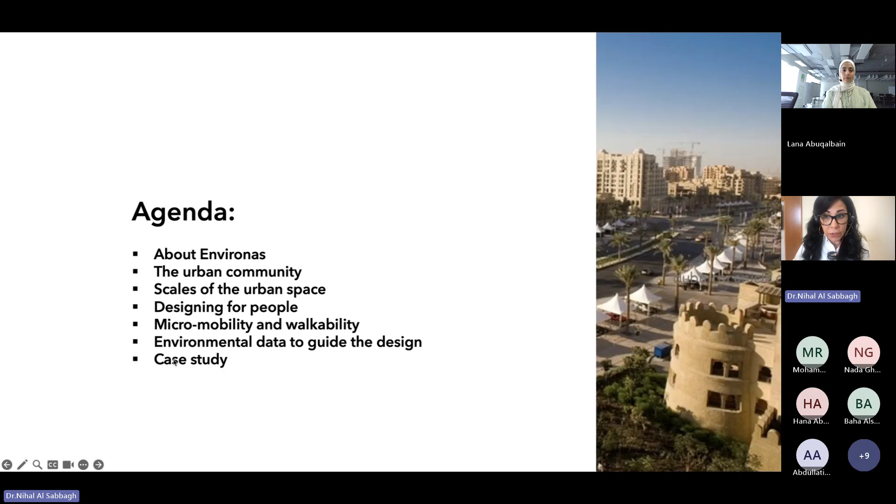So today I'm going to discuss what the urban community means. I will touch on scales of urban spaces and the notion of designing for people, which is a very hot topic taking over in many cities across the world. I will also define the notion of micromobility and walkability, particularly in hot cities, and showcase how we used environmental data to develop our projects in guiding the design for walkability. I will, last but not least, end with one of the case studies that we have worked on at Environas.

At Environas, we have a vision and a mission, which is sustainability at every space. And when I say every space, that means outdoor spaces, indoor spaces. So we do multiple services that have got to do with design and assessment. But the way how we envision sustainability is embedded within the people, the attributes of the physical environment as well, and how they integrate together.

We have three sets of services at Environas, one of which is environmental design. We conduct architectural design, urban design, interior and landscape, all based on the fundamentals and parameters of the environmental pillars that are needed. We integrate sustainability measures that touch also on economical and social aspects. We conduct environmental assessments such as energy modeling, lighting assessments, post-occupancy evaluation, and microclimatic analysis, which is what we are going to elaborate on today. We also do life cycle assessments and environmental impact assessments.

We have multiple partnerships with other entities in the UAE and in Egypt that also assist us with taking different scales of projects. We believe so much in research, internally and externally, so all our designs and environmental assessments are based on research, and when we say that, we conduct our own research. Myself, as an academic, I do conduct a lot of research in multiple environments and integrate that into the assessment and environmental design services. Today I'm going to touch on that in multiple points, and how through the research I was able personally at Environas to conduct assessment services and derive from that a design solution.

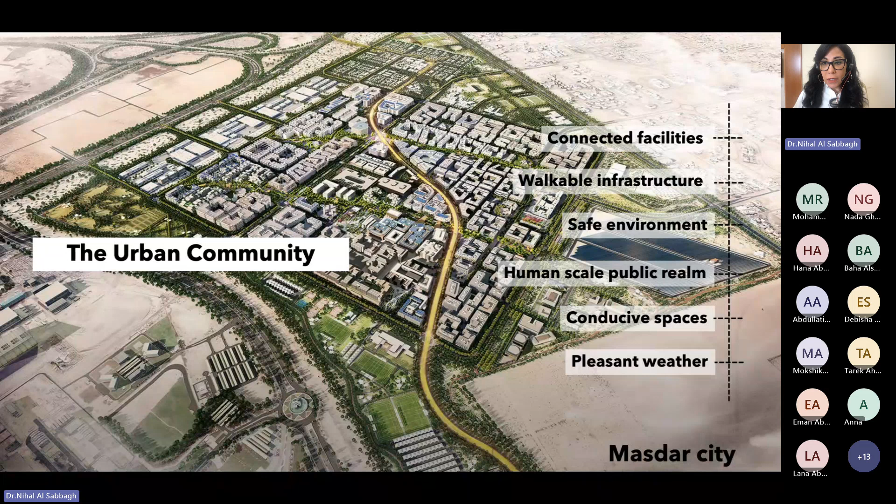Sometimes we do see, and I think many of us have experienced that, whether in the UAE or across other countries, that we do live in urban areas but not urban communities. And when I say urban communities, it means that the intangible part, which is the social interaction between people, the other dimensions, are not there. What creates these conducive spaces, such as walkability, such as interaction, is the connected facilities, for example. What gives you this sense of belonging to this particular space comes from also the notion of safety, whether it's family oriented, whether it's more of individual livings.

Of course, the case for Masdar City is a very early starter on that particular notion, where car-free routes were designed at a very early stage with sustainable mobility modes to be able to transport people between different points within the urban area through other modes than cars or electrical cars, as well as walkable infrastructure. When I say that, the case study has been able to look into multiple dimensions, such as shade, such as ventilation, and other aspects.

So when we look at the urban community in Masdar City, what brings everything together is the notion of car-free routes. We have residential areas, commercial areas that attract people to move between one point and another, and public spaces, which is where people are moving and interacting.

We have community facilities, very important for connectivity of the urban area. We have mobility and transportation, touched on earlier regarding sustainable transport. The infrastructure there is essential to define a successful urban community, all under the umbrella of governance and safety, to take it to the next level where social interaction happens. We also have economical and employment zones, environmental and ecological features, as well as cultural identity and aesthetics.

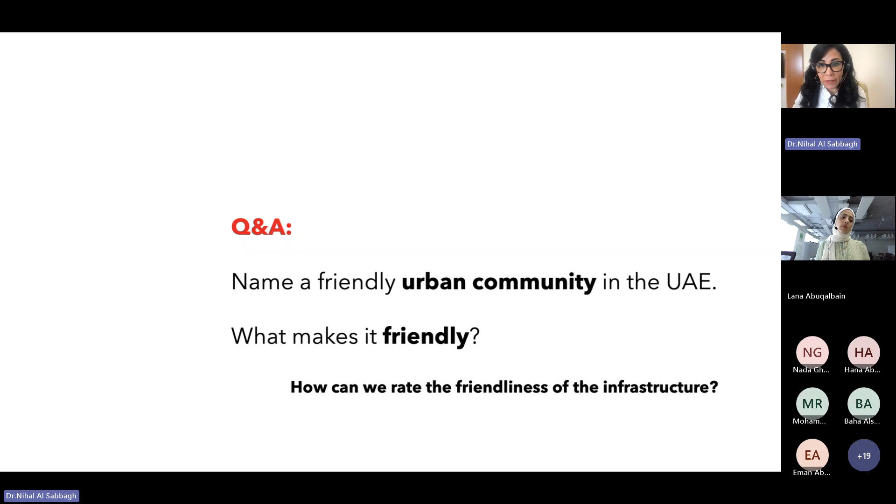Okay, so I highlighted three urban communities, one of which is Greens, Jumeirah Beach Residence, and Downtown. The three examples are totally different compared to each other.

Greens is a residential area. It does not focus on commercial facilities, however it has a few amenities there. It has a school, a market, a mosque, and so on. However, if we rate or look at the infrastructure design, it's very successful in terms of height to width ratio, shading, greenery, and so on.

But do people actually move? Do people actually walk or use scooters and bikes, and for how long? The Jumeirah Beach Residence, on the contrary, is a little bit different.

The human scale there is different compared to Downtown and Greens. Still, the infrastructure is very live, and the reason is the presence of facilities and amenities. The commercial facilities there are responsible for attracting too many people into the space, reviving walkability despite the lack of shade or urban ventilation, which is a little different compared to Greens.

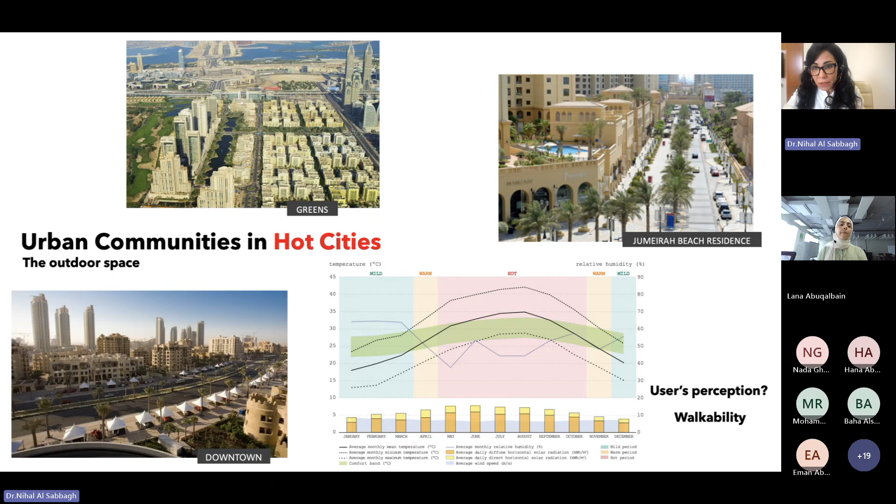The reason I say that is even when we look at the warm period in April, you could walk in the spaces in the evening and they're still hot. So they are not conducive - you're still bothered whether by the heat or the humidity levels. The reason for that is the heat balance parameters involved, which is the time of heat exposure, whether this space was able to breathe and release back the heat accumulated during the time of solar radiation, depending on the enclosure.

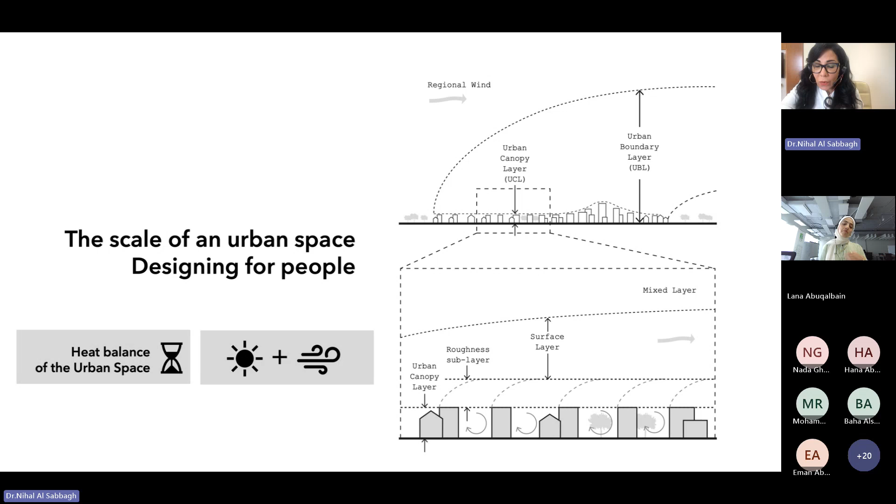So the solar radiation has been removed, however the humidity was there. But this space performed very well during later times of the day, when the solar radiation was not there - so this space would probably be cooler. It's a very good strategy to cool a space used not necessarily during midday but even during the evening. During midday at high humidity levels it did not perform well, but during other times of the day it did.

When we look at that, it's very important to look at the time of day that there is a flow of pedestrians between one point and another. These routes are being analyzed - so when we look at the master plan, we look at these routes and what they're connecting. If they connect a school and a metro station, or a school and residences, you can see people walking, so you'd automatically identify that the needed strategy for ventilation and shading would be to cool the morning or daytime, and the afternoon if parents are coming to pick up or drop off their kids.

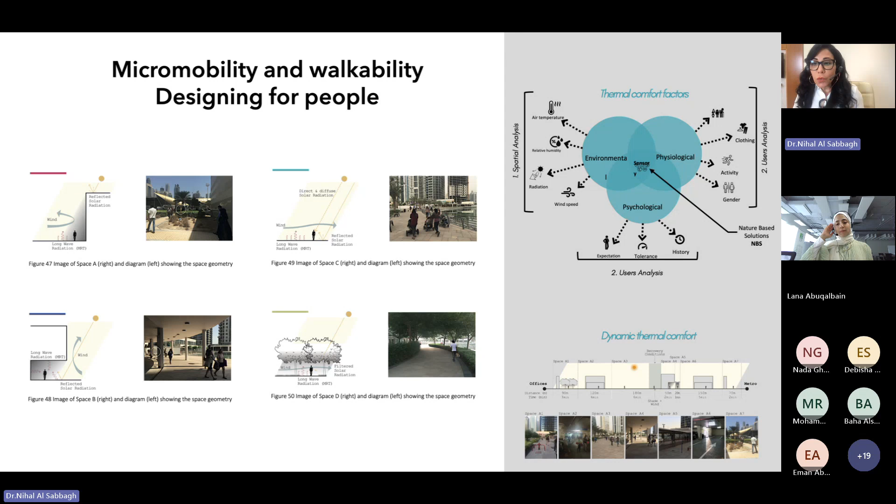This is how we look at designing for people. So how did users in this particular urban community perceive it by the end? I won't go into much detail, but the same sequence of spaces has been analyzed in multiple communities during the mild period, the warm period, and the hot period.

Whenever we look at the mild period, we know the results will be great even if there are sunny routes or lack of shade. The warm period is a little subjective—depending on the particular infrastructure present, it influences a person's overall comfort. The hot period is very challenging because we want year-round walkable spaces, which many urban communities in the UAE are now targeting. We want to create walkable communities in conditions above 40 degrees Celsius, where you can still enjoy the infrastructure even during the hot period.

Is that possible? If we don't do the breakdown and focus on what we call comfort declining zones, and provide solutions for them, we will not be able to achieve that.

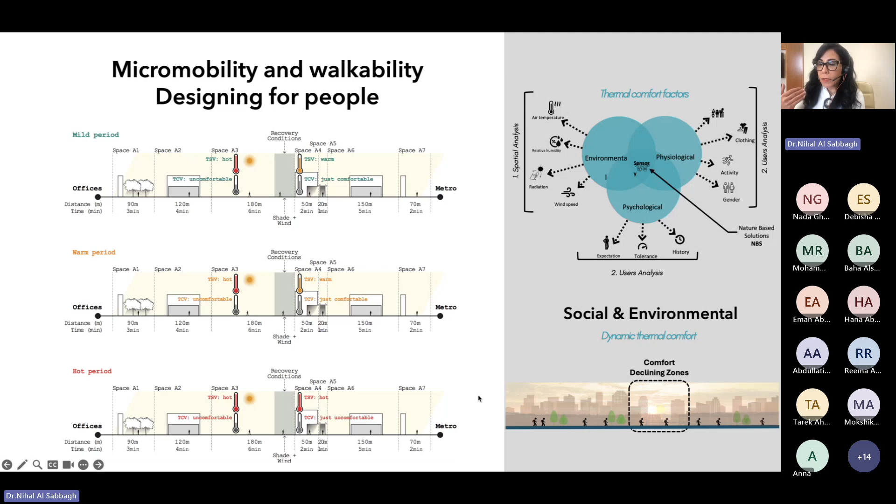Sometimes identified as hotspots in microclimatic assessments, but the way we conduct microclimatic assessments for master plans on a larger scale doesn't necessarily integrate interpretations for pedestrians' perception.

From these data sets, we conducted an experiment on multiple individuals throughout the year in the UAE during the mild period, the warm period, and the hot period. We wanted to know how much people can walk.

How much can people walk comfortably, to identify this threshold I'm talking about? At some point it's too hot, I'd rather have some fresh breeze, or I'd rather have some shade. So this experiment was conducted for a sunny route under the lack of shade, with people moving between the indoor and the outdoor.

One very significant factor responsible for comfort drop in the UAE is the shift between indoor and outdoor during the warm and mild periods, because buildings are set to very low set points. When you're indoors at 20, 21, or 22 degrees Celsius and move outdoors where it's 25, 26, or 27 degrees, that's not bad in terms of air temperature alone.

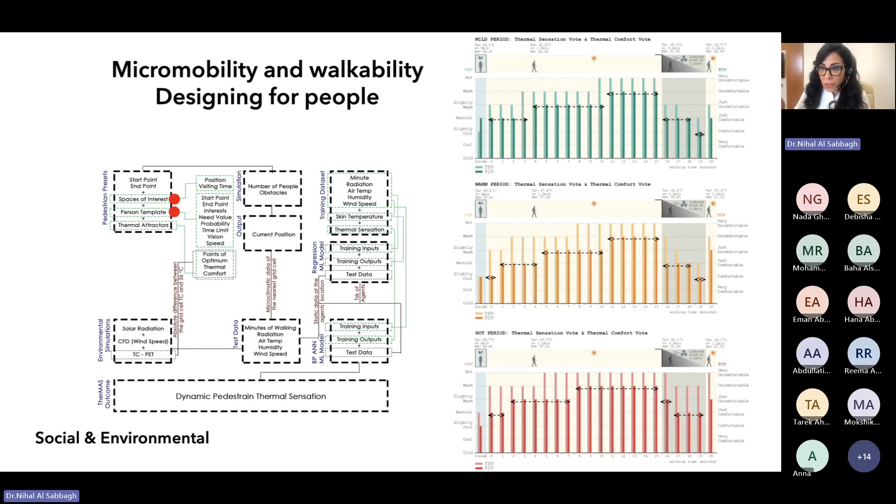We coded them and then integrated them into the agent-based simulation model, observing what happens along the successive changes. That's the reason why we are developing currently something called a thermal credit system. A thermal credit system is simply the charge of that particular reservoir that we have as users when we access the urban environments, how much this varies between one person and another, depending on the clothing, and how much we are able to walk and move between the spaces comfortably, and what is the threshold in that particular journey that would deter us from walking during that particular time or even during other times of the day.

So when we look at the indoor environment, again, touching on the shift between the indoor and the outdoor is very important in deferring comfort, passing through the successive changes, and then how hot are you able to get, and then how hot would you stay. So it also influences how much time and thermal differential you need to cool down.

And that brings us to the notion where mechanically cooled spaces become essential for these particular routes. So if you get very hot and you're able to walk for like another 5 minutes in a very hot condition or a sunny space, for example, even if we provide infrastructure with greenery and vegetation, that would not be able to improve comfort.

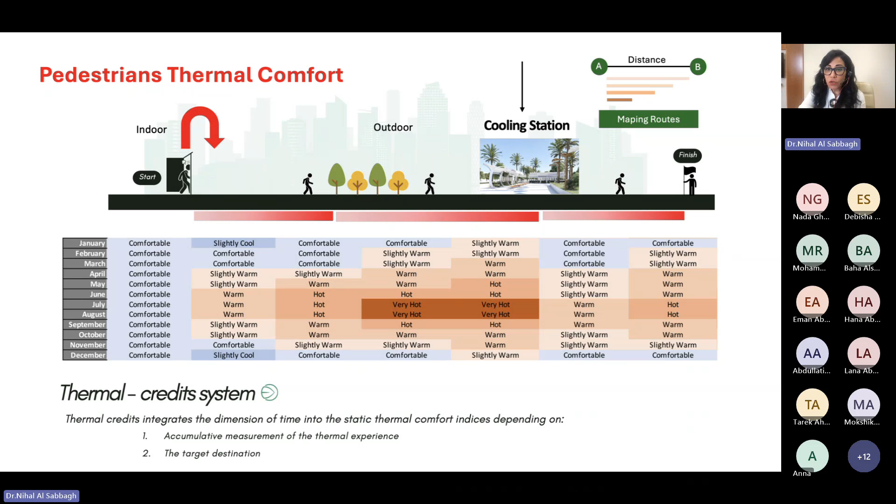So the thermal credit system includes this accumulative measurement, and it takes into consideration all the parameters we are talking about, including the skin wettedness and the metabolic rates and stuff like that. So the whole purpose is where to add the cooling intervention, at which point, and would it actually be able to boost the thermal comfort after that.

This brings us to the idea of course, it's a 15-minute city span, 15-minute walk span, so radius. And that particular radius, we started looking at how many individuals, based on the actual sample of population, would be exposed to heat, would they be exposed to better cooling measures. The whole purpose is to provide the customized solution, as we mentioned, and how much does it require for that particular cooling.

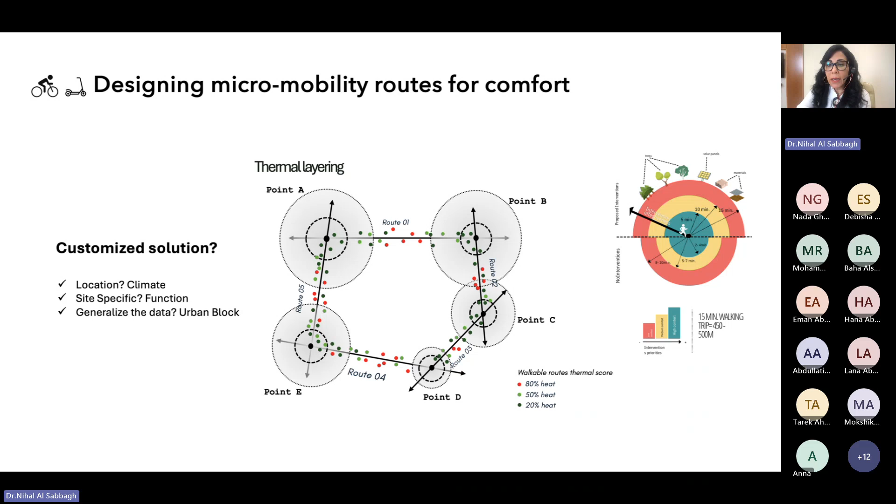So this is a sample of the agents that have been induced using a crowd simulation inside the urban area, moving between the different patterns, moving between the different outdoor spaces. And when I mention that, it's again the shade of the building, it's the shade of the infrastructure, it's thermal attractors. So the whole purpose is to be able to guide.

Maybe at one point we would have one route that is very efficiently designed, even if it has a mechanical cooling intervention. And we would guide, or could we actually attract users or pedestrians to walk from that particular route in that part of the year instead of using the rest of the infrastructure?

Because when we conducted a lot of surveys on ground, we realized that people are walking between the shorter distances. So despite the fact of shade, despite the influence on the psychology and everything there, unless you are going for a leisure walk, you would still choose the shorter route or shorter distance.

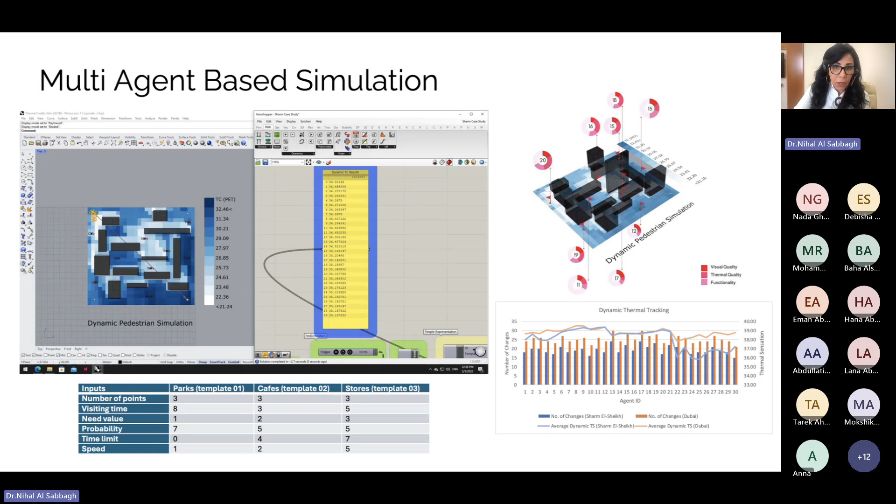So this is again the set of presets and input data sets that we used, and this is how we define and name them. I don't want to touch much because I want to leave room for Q&A.

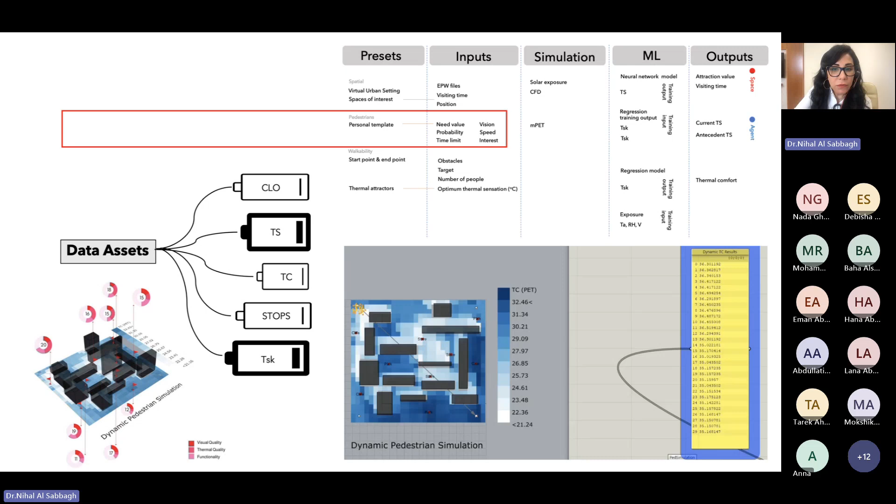And of course, we started questioning the existing green guidelines that are there. So the existing green guidelines, such as Estidama, such as Mustadam, such as Active Score, and so on and so forth, they give you the shading or the cooling spots that are required at 100 meters, 150, and 200 meters between one point and another.

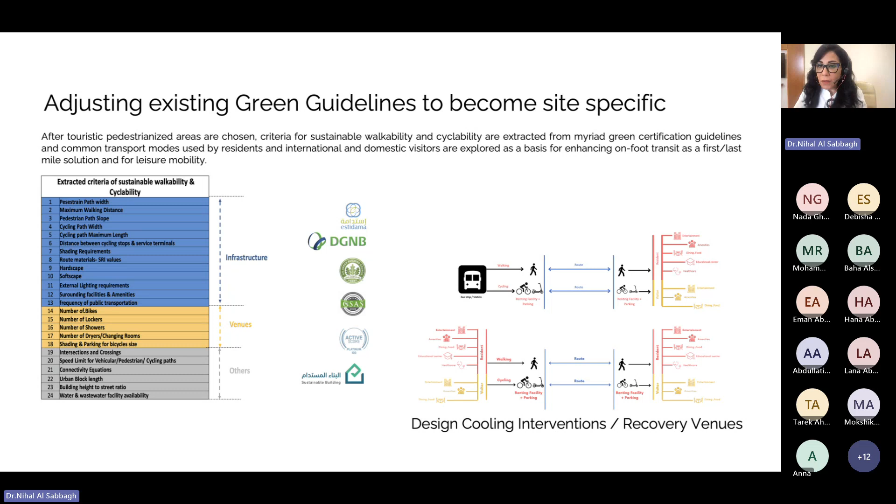However, they are differentiated. So if you are providing a cycling infrastructure, the span is 1,500 meters, for example, so these are the stops. Regarding the interventions for greenery, that is at 100 meters. For the pedestrian stops, it's 150. So they are separated, left to the designer or the architect, master planner, and so on, to be able to overlay this data and these numerical values to design what we call recovery venues.

So the recovery venues, we proposed that in COP27. We had a winning proposal in COP27, which was in Sharm el-Sheikh, where we designed collectively all of these aspects. We imagined immersive spaces in hot environments that you would walk into, with water features, the breeze, the birds, to boost the psychological parameter in comfort and provide people with longer walkable durations.

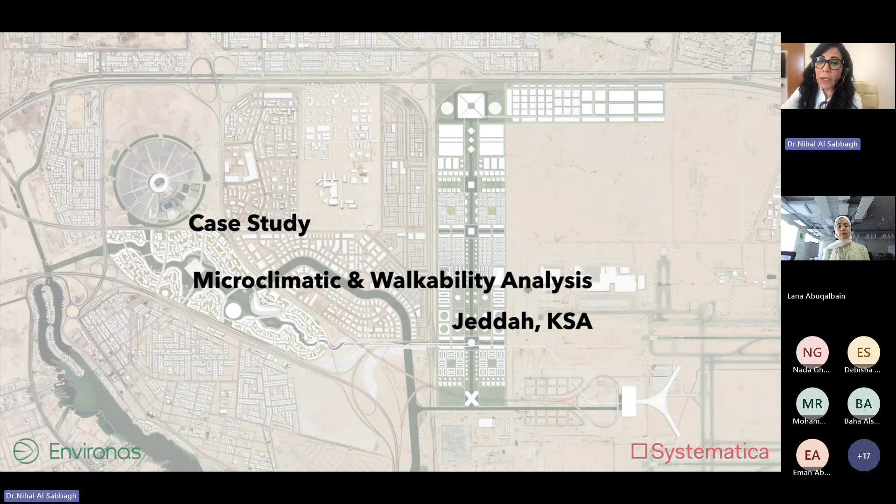I will touch on the last case study, for the microclimatic and walkability analysis, where we worked with mobility experts, Systematica, for Jeddah, to be able to improve the infrastructure. We were able to provide a microclimatic analysis for the urban streets.

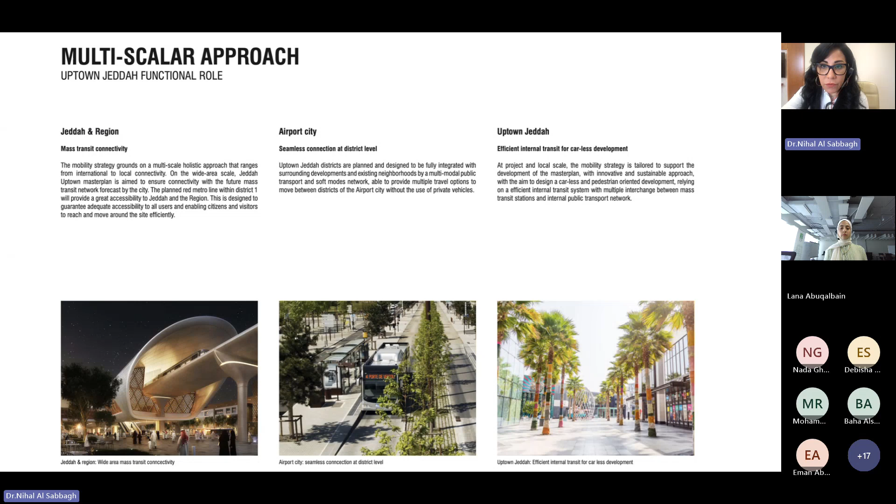The project touches on multi-scalar modes, sustainable transport modes. It integrates buses, cars, infrastructure, public networks, as well as micromobility active modes such as scooters, bicycles, as well as walkability and pedestrians. And due to the hot weather conditions, how we deal with the infrastructure is very important.

So the mobility strategies needed for the soft modes was considered as the last mile solution. After you get on your bus, after you get on the metro station and reach your destination, there is always this patch that is very important to connect you to your destination. How is this patch designed and how much can we increase that as well?

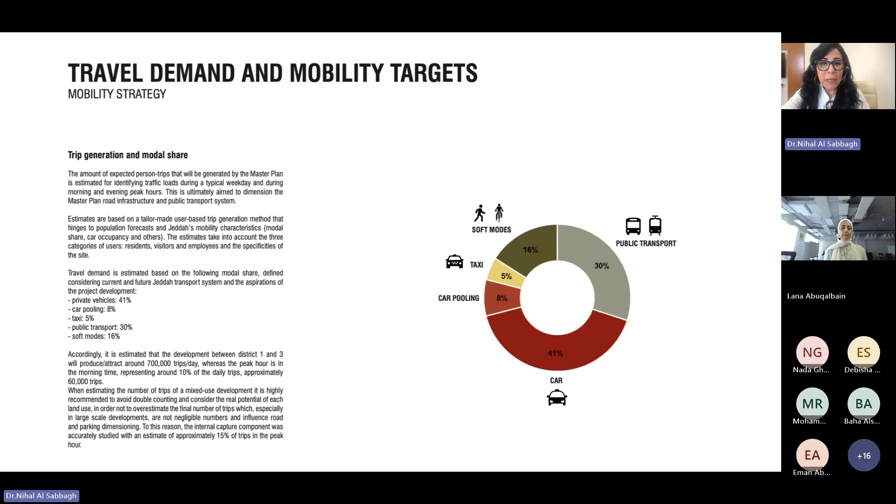So we dealt with the whole master plan and tried to analyze it again in terms of static and dynamic. The dynamic comfort is very important where people are moving. When we look at the thermal maps or heat maps, which we usually generate in a lot of microclimatic assessment analysis, sometimes they are required, so we do submit them, but I'm not personally very fond of them because they are static. They do not represent how you see this particular space as you move between multiple spaces.

The comfort range is critical for us to deal with between March and November, and we have a potential for improving outdoor micromobility between March, April, and November, avoiding May to October. When we deal with the very hot period in actual projects, we have to identify heat stress levels because apart from thermal comfort, they are very critical for improving walkability, and you don't want people to get heat strokes or anything.

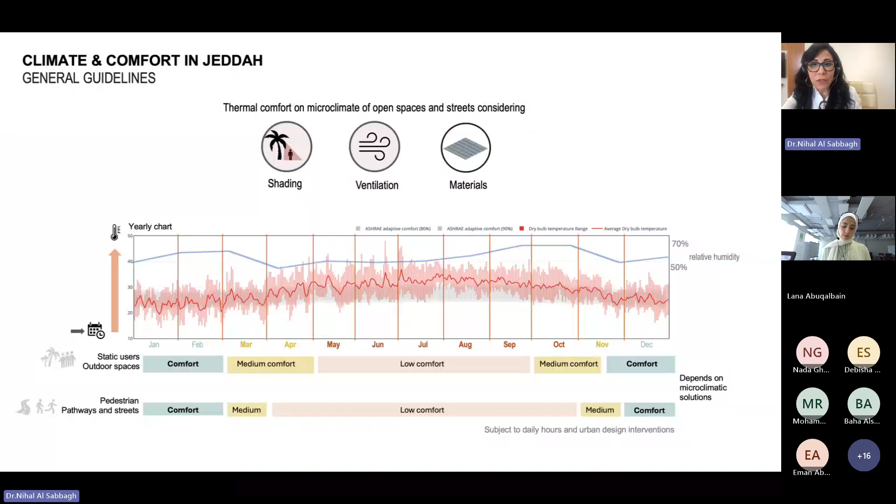So for the whole master plans, we conducted solar exposure as well as shading analysis for the massing at a very early stage. The project is finished, but these are the very early stage studies. When we conduct that, we identify the overheating zones and the areas where no further interventions are needed. It's very important to identify the type of shade that does not deprive ventilation, because ventilation is very important in high humidity areas, similar to the UAE.

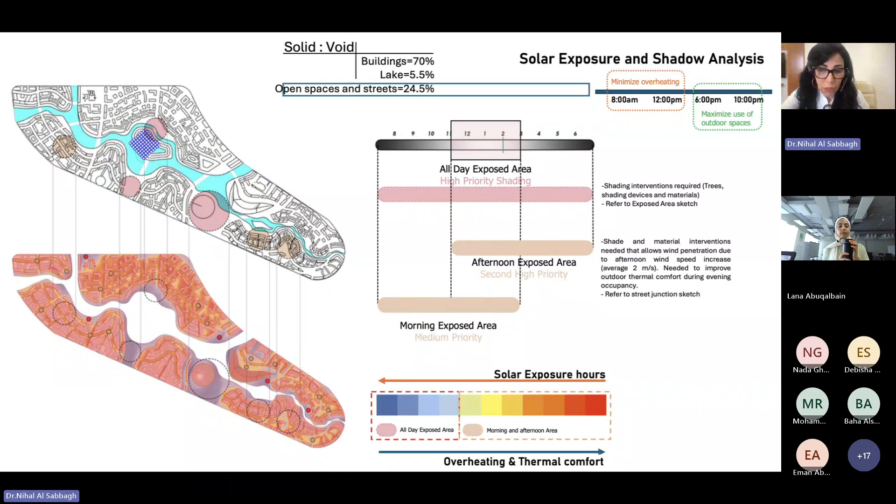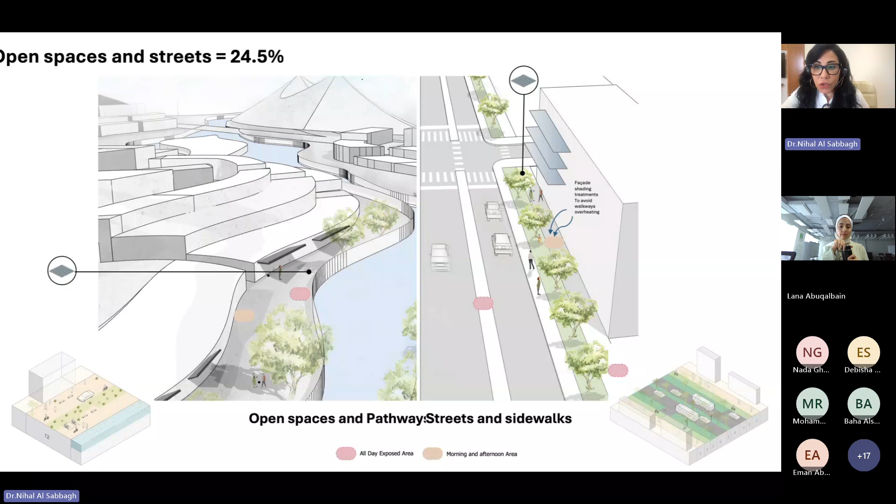Then we looked at the breakdown, the thermal comfort and thermal sensation, and started designing interventions and shading pathways for the trees. We looked at 4 cross sections for the urban streets, and when we look at this cross section, we started breaking it down and looked at the sidewalk. The height to width ratio is very challenging.

When we dealt with this particular project at a larger scale, from an overview scale, it gave us results that are completely different when we zoomed in at a pedestrian level. And that is because the cross section for pedestrians, depending on the mild side, as Systematica has a few studies in that particular track — take a walk on the mild side.

So depending on the time of the day, the time of the year, shade would be provided on one side of the street. Generically speaking, it would not work if we are trying to deal with the whole cross section of the street.

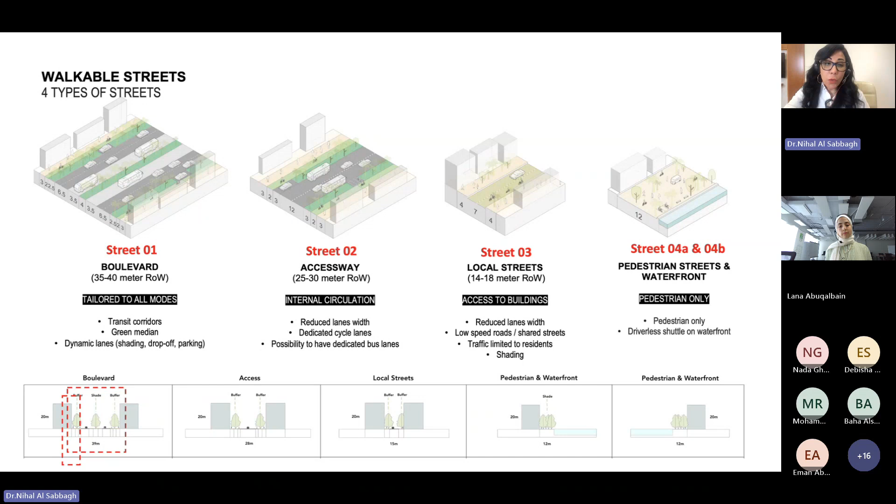Urban greening was very important, but ventilation again was critical, and we were able to analyze the ventilation penetration between the buildings to be able to provide these repetitive urban ventilation and cooling along the sidewalk.

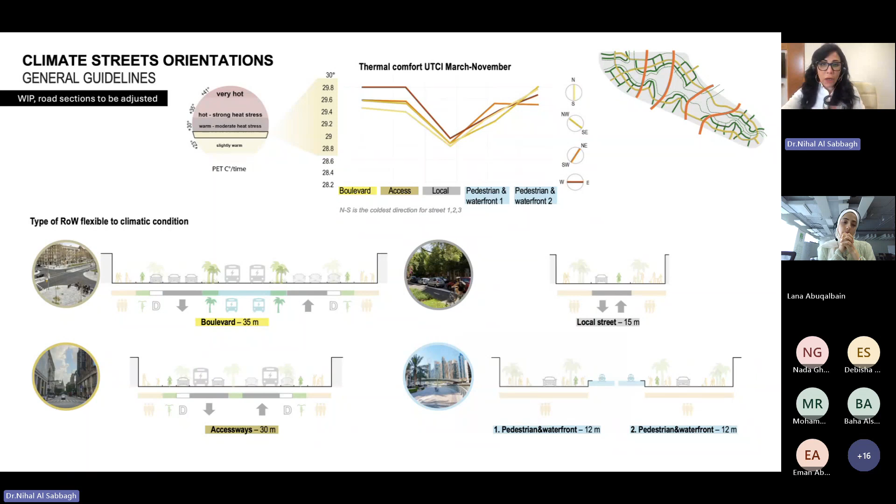We looked at the connectivity with public transport, such as the metro stations and bus stations. I think the idea of the bus stations could take another discussion. The air-conditioned controlled bus stations in the UAE work for some times of the year, but they're not very conducive for many people during other times. So what is it that's required there?

We looked at these and considered them as transitional spaces that provide mediation between the indoor and the outdoor. So we need to avoid the shift or large thermal variation between the air-conditioned environment and the outdoor weather conditions, which is also very similar to the climatic conditions of Jeddah.

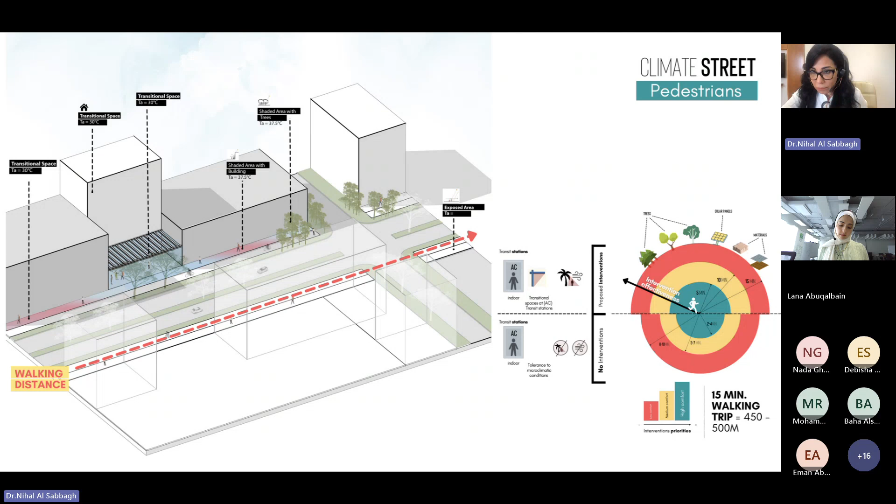Then we came up with a set of strategies required for north-south oriented streets, east-west, depending on the ventilation. And greenery, which is grass - it usually performs very well in multiple conditions, however it consumes a lot of water, so we're not very fond of large patches of grass.

Albedo, or the materiality used for sidewalks, is very challenging. The higher you go for better thermal performance, the larger the cost becomes, and this is a challenge we always face with clients. So if we go for grass, it's the water consumption that's the problem. If we go for higher materiality, the cost is again the challenge. So we looked into all of these in the set of recommendations we provided.

The type of shading is also important because usually palm trees are used, especially in downtown areas for example. Palm trees are beautiful, they have a very good appeal, and they emphasize the cultural aspect of Gulf cities in general. In that particular sense, do they provide shade? They're very poor in providing shade. They look good, provide beauty in the outdoor space and so on, so we were trying to avoid palm trees, also because of the water consumption they require.

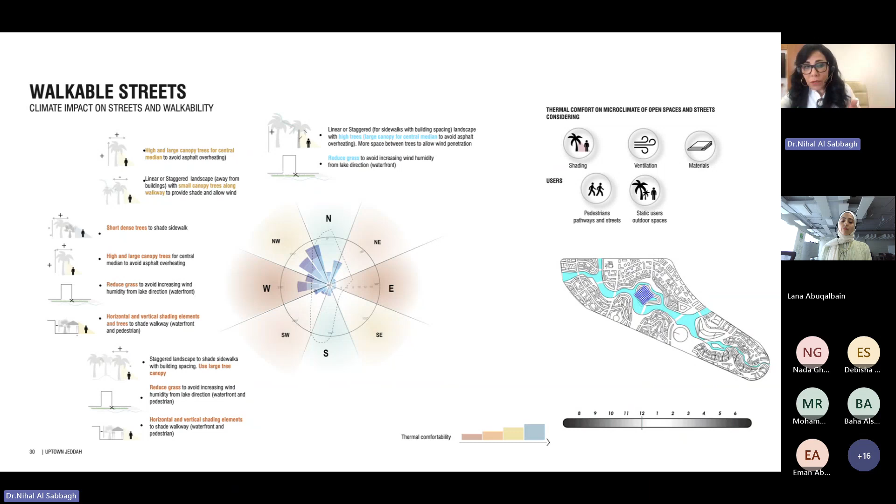We looked at the materiality of the buildings as well, and the horizontal and vertical shades. So also the horizontal and vertical shades provided by the adjacent buildings is very important to be able to maximize and benefit from that for shading the sidewalks.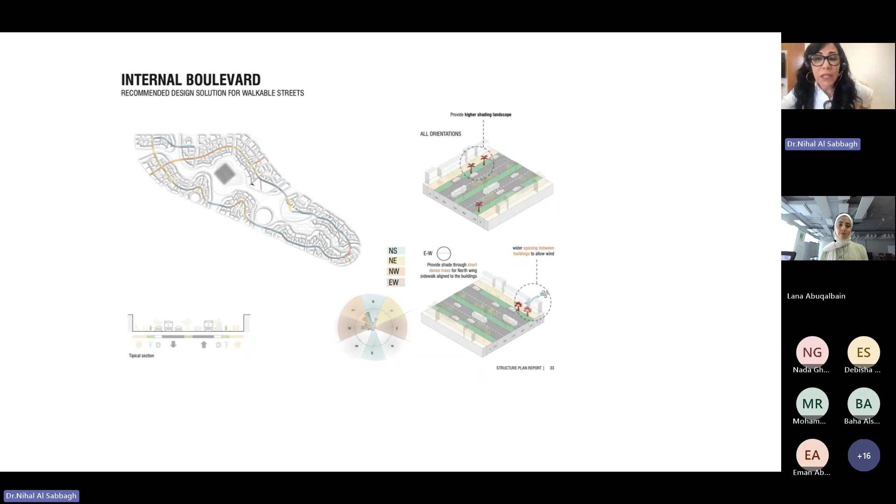And then we conducted this thorough analysis over the whole master plan, despite the connectivity and the facility, which was integrated at a later stage. I won't be able to show that, unfortunately, at a later stage with the other stakeholders in the project. So this is the same, the shade and ventilation.

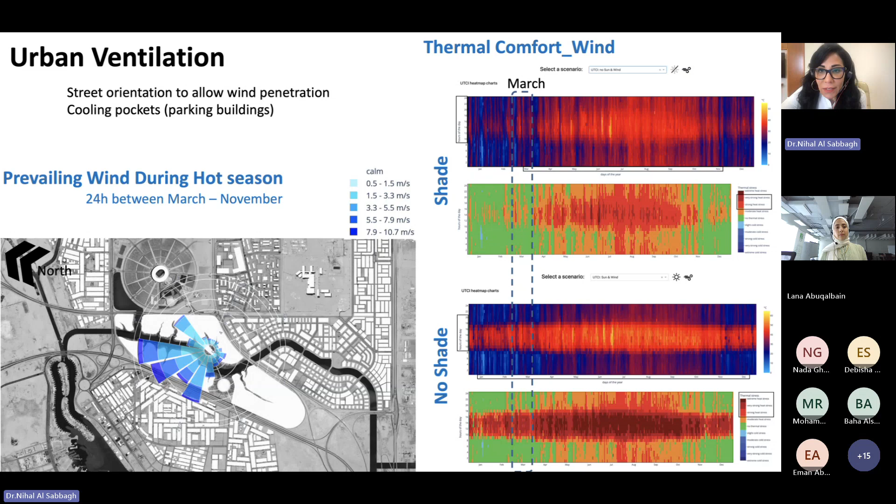In conclusion, I think we still have, I hope, more than 5 minutes to take questions and answers, but I wanted to summarize from all of the research, assessment, and design ideas that I've displayed. What is the summary for conducting the climatic and microclimatic assessments for urban areas?

I would say it's very important to conduct microclimatic assessments using local data. Find the sources, look for reliable sources for climate data. Climate data is not what is there on ground, so be critical with that. Existing research or measured data usually bridges this notion, because there are discrepancies of more than 5 degrees Celsius in temperature and wind speeds and so on.

So try to bridge that, conduct a climatic classification. It's very important to understand in any of the cities we work with, what is the climate classification when we deal with pedestrians or when we deal with designing cities for people. How do we bridge this climate classification based on human perception?

The environmental analysis for the master plans - what are the main components we're using now? Is it greenery? Do we have water bodies? Is the humidity level high? Where do we put that with urban ventilation? Of course, the passive strategy measures, if you do understand that. If not, there are a lot of very interesting references out there that would help you provide the environmental zoning we call based on the assets that you have.